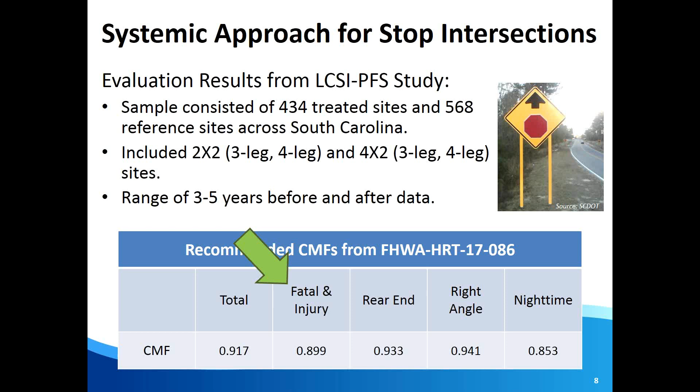So it's not to say that one size fits all, but definitely it's about how many low-cost treatments can we put together in a way that makes the most sense for us, and how can we get those out there in as many intersections as possible. This is a great way to work your strategic highway safety plan to try to meet your goals for driving down intersection fatalities and injuries. It's a great way to get some experience with a systemic approach to safety using HSIP program funds, and it can dovetail with other contracting methods that are still innovative in some states.

So what they did in South Carolina was actually do it as a design build contract. I know Florida's got a lot of experience with innovative contracting methods, but this does not have to be the standard design bid build approach. So to have a design build contract that is statewide, like they did in South Carolina, that was an innovative way to do it.

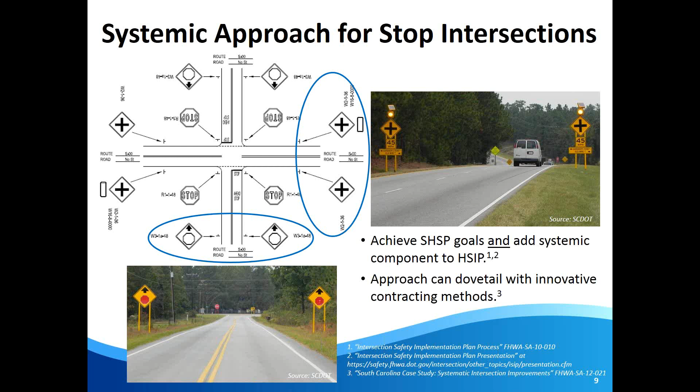And now we're even seeing other states. Missouri just won a Roadway Safety Foundation Award back in the fall of 2017 for work that they're now doing, where they're saying, hey, we're not even going to do the design. We're going to do some preliminary data analysis, and we're going to put out for bid - you tell us as the design build team which locations you could treat for this much money and get the biggest bang for the buck. So we're seeing systemic definitely continue to evolve here.

The second intersections countermeasure is the reduced left turn conflict intersections. These are the median U-turn and the restricted crossing U-turn, and I'll talk about both of those separately. What they both have in common is these are intersection geometric designs that change how left turn movements are handled. The basic idea with these, and with all innovative intersections, is to simplify and reduce or modify the conflict points related to turning.

Both of these have proven safety and operational benefits. This is one of those great ideas that can truly reduce congestion, reduce delay, and make your intersection safer.

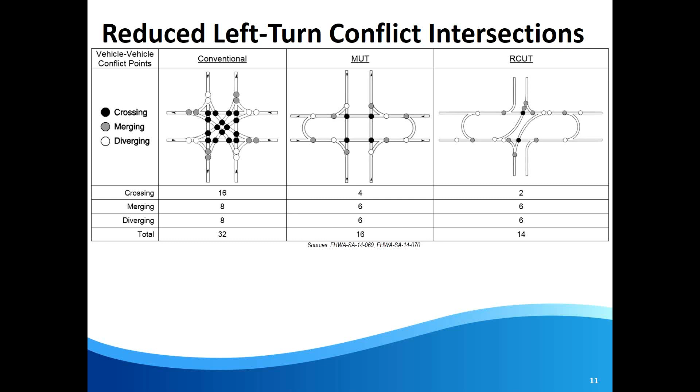Just a quick look at your basic conflict point diagram comparing a conventional 2x2 intersection to their equivalent median U-turn and restricted crossing U-turn. You can see how the number of crossing conflict points are substantially reduced with each of these designs. That's obviously one of the secret ingredients that makes these so much safer. The bottom line for improving safety performance: the median U-turn can decrease fatal and injury crashes by 30%, and the restricted crossing U-turn can decrease fatal and injury crashes by over 50%, a 54% decrease. So tremendous designs for addressing severe crashes at intersections.

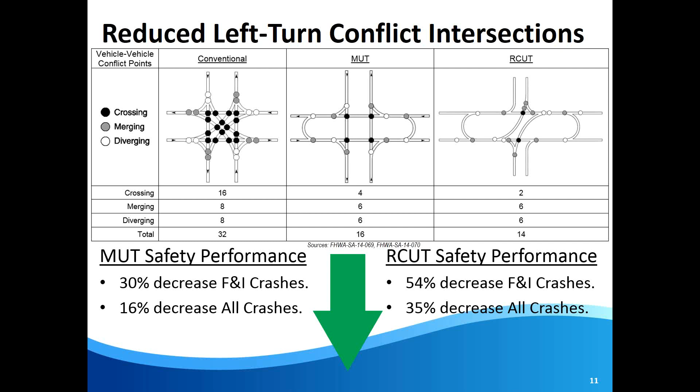So what makes these two a little bit different from one another? Let's start with the median U-turn. With the median U-turn, the major route and the minor route both still allow through movements — those do not change. But what can change is that the major route left turns, instead of allowing direct lefts at the main intersection, are now handled by downstream U-turns followed by right turns.

Using that same U-turn is optional for the minor route. It can be done when left turn demand is in the intermediate to higher range, but it's not always done that way. Here's one case where the signal phasing and timing advantages have a tremendous benefit across the board — it's not just about benefits to moving vehicles. It's got higher capacity, shorter signal cycle lengths, reduced delay, and reduced queuing because you're servicing traffic more frequently throughout the hour. But it also can benefit the pedestrians that use this intersection.

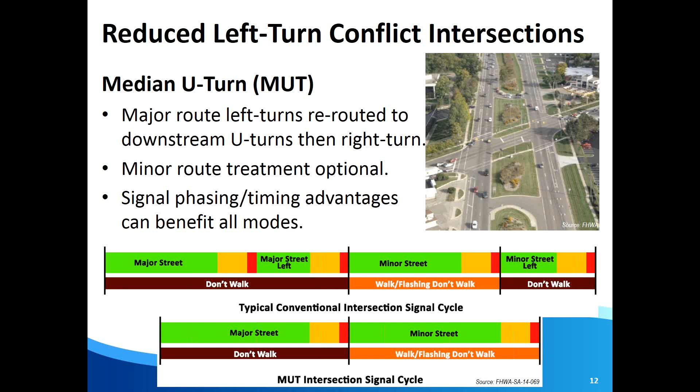I know Florida has some large intersections, and I know you guys have challenges with pedestrian clearance times. Now imagine if you had shorter crossings, but could still handle the traffic demand that exists there. You can reduce the amount of time needed for pedestrian clearance. You can split it up into two-phase crossings, because now instead of a single, dual, or triple left turn lane, you've got median space where pedestrians can wait comfortably, working as a two-stage crossing. You can service not only the traffic more frequently, but the pedestrians more frequently too. It can be much more convenient for a pedestrian to cross that intersection because they're going to get that walk signal more often, and it's going to last longer. So it can be a very beneficial treatment for pedestrians as well.

Now the restricted crossing U-turn is a little bit different. On this one, the major route movements are unaffected — it's the minor route movements that are affected. No longer from the minor approaches would traffic be able to continue through the intersection or make a direct left turn. The minor route approaches are all forced to turn right and then use a downstream U-turn to come back and either complete the through movement or complete that left turn and continue past the intersection.

So far these have been very popular along high-speed, divided, 4-lane highways — the class of highways we'd normally refer to as expressways, where you still have at-grade intersections but also high-speed, high-volume conditions on the main line. Very effective, as I mentioned, a 54% reduction in severe crashes. They introduce a little bit of adverse travel, but because it's easier to split up the decision-making process, a driver on that minor route approach only has to decide, do I have a gap and is it safe to make a right turn, and then make any necessary lane changes to get into that U-turn bay, as opposed to having to decide, can I cross the approaching traffic to my left?

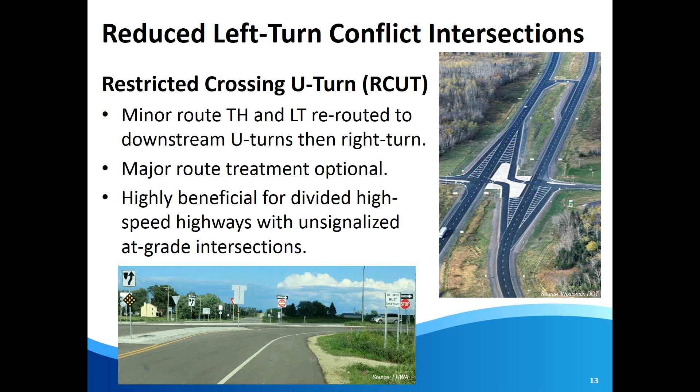So I'm going to pause there for a minute and just see if we have any questions so far on the intersections proven safety countermeasures. We do.

Before you got to the countermeasures, you were talking about an initial list of 31 possible countermeasures that were considered, and then it was pared down to the 6 new ones. Is that correct? Is that list of 31 available anywhere, just for consideration, to get ideas out of? We have not published that list. I would have no problem sharing the list of what we considered with someone, but we haven't published it. It hasn't been vetted for that purpose.

I can tell you that it had everything from some of the other things that were on the list that weren't selected ultimately, like intersection collision warning system, sinusoidal rumble strips, green painted bike lanes. So we had a lot of things. We had some things that were really kind of cutting edge and maybe not quite ready for a proven safety countermeasures level yet. But yeah, if there's interest in knowing more about that list, I can go back and make sure that it's okay that we share that.

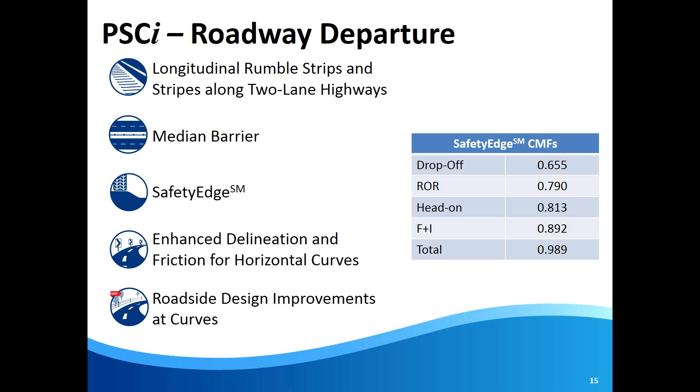The new one, roadside design improvements at curves, addresses the scenario of what happens when they leave the road. This is about improving the roadside, from the shoulder on out, not so much about keeping vehicles on the roadway.

So there are three components to this countermeasure. The first is increasing the clear zone at curves, which we'll go into more detail on in the next slide. This is actually recommended by the AASHTO Roadside Design Guide and has been in there for decades. It's a proven way to reduce crashes, so we think it's a good time for people to be reminded that this is out there, it's been out there, and maybe take a fresh look at it.

The second component is to improve traversability of the roadside. You start by looking at your shoulders and seeing if there's any adding or widening of shoulders that might be the first thing to do. But really it's about looking at flatter slopes at curves. This is a case where, taking a systematic look at the risk factors, we're not saying you have to use flatter slopes across your entire project. Just look at your curves. If you want slightly steeper slopes in the tangent sections, that might be okay, and then flatten it out a little at the curves where we know there's a higher risk of running off the road.

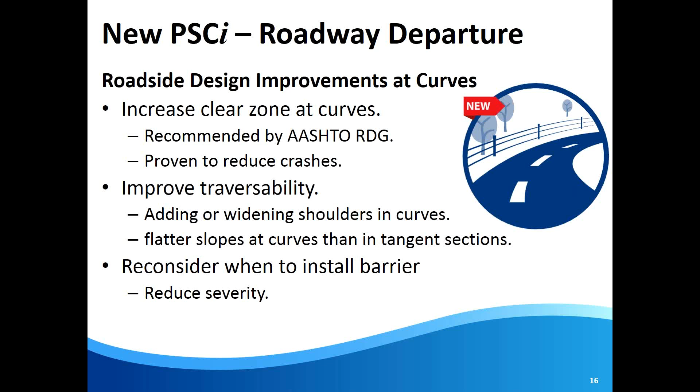The last component is reconsidering when to install barrier. We know there are now more choices for roadside barrier, some designed to be less severe, so this might be another chance for states to take a look at where they are using these systems.

Let's take another look at that first component, increasing the clear zone. If you go into the Roadside Design Guide and look at table 3-2, you'll find there's been a horizontal curve adjustment factor in there for a very long time. Basically, you'll see anywhere from a 10 to 50% increase in the calculated desirable clear zone on the outside of a curve. So what we're saying is that if we just focus on the curves and try to get a slightly more generous clear zone based on the curvature and the design speed, that by itself could help you avoid a vehicle running off the road and hitting a fixed object, hitting a water feature, whatever the case may be, whatever's on the outside of that curve.

You can see here, just by increasing the clear zone, you can have anywhere from a 22 to 44% reduction in crashes. And again, by targeting the curves, this doesn't have to be a scorched earth approach where an entire corridor is stripped of trees or greatly modified and potentially controversial. Just focus on the high risk areas.

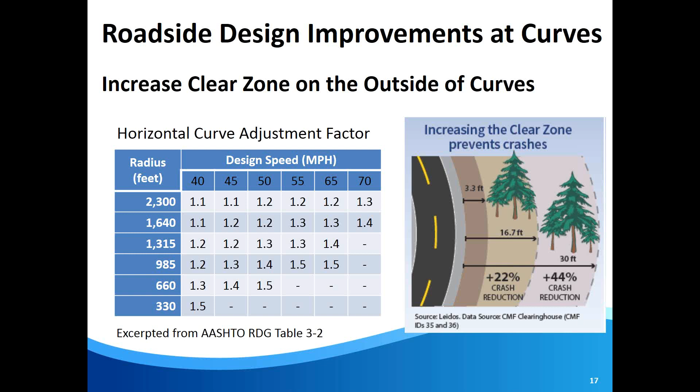This is really important because we've got 3,500 people killed in crashes every year in a roadway departure where the first harmful event was hitting a tree or a shrub. So we're looking at where we can be more selective with those trees, poles, and rigid signposts.

That second component is about improving the traversability. So again, focusing on the curves and saying, can we make the curves a little bit flatter than the rest of the roadway?

It's funny because even while vehicle engineering advances have basically become the status quo, things like electronic stability control, when a vehicle runs off onto a roadside, those systems do help. But unfortunately they don't help on curves, because the angle of the trajectory of the vehicle as it's running off, those systems just can't compensate for the abrupt change. So we know those systems work on tangent runoff roads, but not on curves.

This could be the difference between, say, where you've got a 3-to-1 or 4-to-1 slope on the approaching tangent, but maybe at the curve we're going to make that like a 6-to-1. Just a little bit milder, a little bit more traversable and recoverable, and that can make a big difference right there.

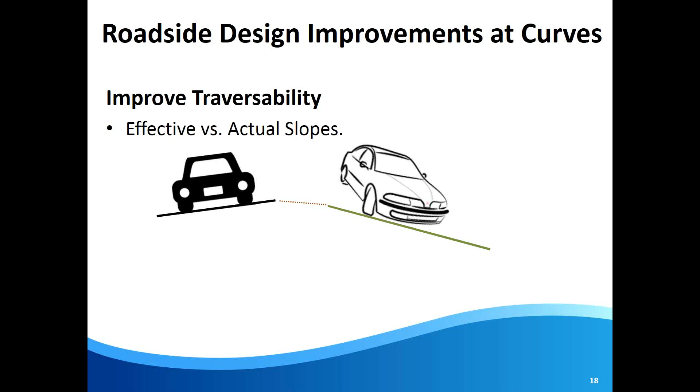And then the last thing is taking another look at whether to be using a roadside barrier at horizontal curves. So just a few things to point out here. Remember that this often-cited figure from the roadside design guide about where barriers should be considered, or where it's not normally considered, is based on fill slopes on tangents.

Not necessarily curves. So that line that separates where we would normally consider a barrier versus not really doesn't reflect the factors present at curves, or the tendency for vehicles to run off at curves. So it's very possible that a barrier can be appropriate on a curve for the same fill slope, even though it wouldn't normally be considered on a tangent.

We also know that we have more flexible barrier systems now, especially cable barrier systems, which are less severe than other types of barrier. They don't generally redirect traffic back onto the roadway as much — they more gently redirect them and then kind of hang on to them.

So this might be an area where a state would look at whether a cable barrier system is something to implement more consistently on curves to address a run-off-the-road problem. That would be something you'd do in cases where you can't address the slope, and you also cannot address what fixed objects or other features may be present on the outside of that curve.

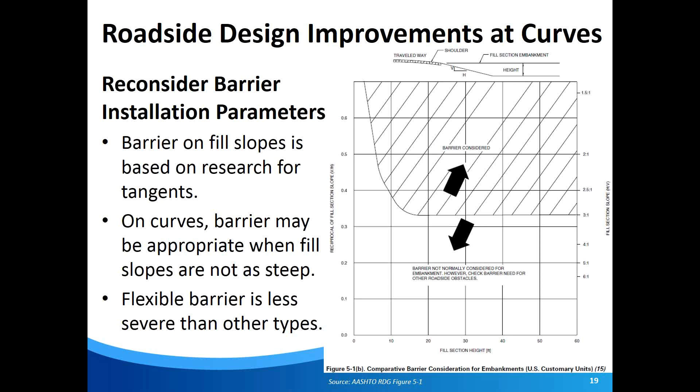So let's pause for a moment and see if there are any questions on roadway departure. The only question that popped up was — and I think we're splitting hairs — does increasing the clear zone reduce injury crashes, or does it reduce all crashes?

Yeah, I think the idea would be to reduce injury crashes, right? That's what we'd obviously be after by increasing the clear zone. I think in the data you'll probably see a reduction in crashes too, because now you've got a scenario where maybe people can drive away — maybe it's a crash that never gets reported.

Yeah, that's why I was saying I think we're splitting hairs, because people will run off the road but they'll be able to continue along the way, and a report will never occur. Exactly. But to be clear, what we're after with this, no question, is targeting the severe crashes when we talk about horizontal curves and the clear zone there.

Yes, that's the only question that came in. Okay, alright, thanks Anthony. So let's go ahead and move into pedestrians and bicycles.

As with roadway departure, we now have 5 countermeasures under the ped and bike category: medians and pedestrian crossing islands in urban and suburban areas, the pedestrian hybrid beacon, road diets, walkways, and now the new one, leading pedestrian intervals.